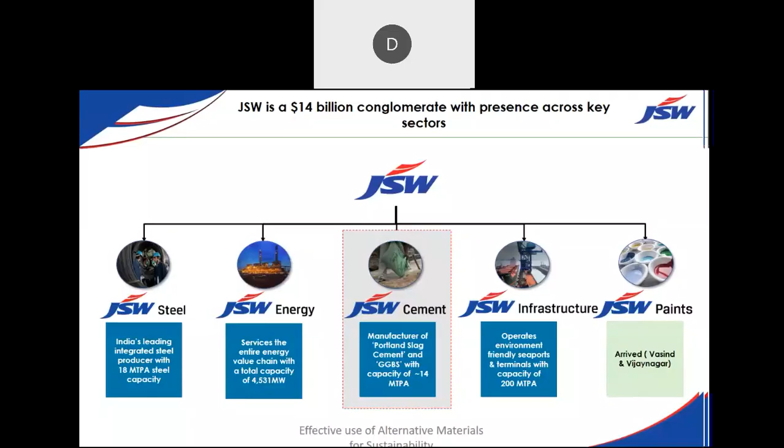I thank Dayananda Sagar Academy of Technology and Management for providing this wonderful opportunity to share my knowledge on effective use of alternative materials for sustainable and durable construction. It's a great event because tomorrow is Engineers Day. Sir M. Visvesvaraya was born on 15th September, and we celebrate Engineers Day across the world. Also, Indian Concrete Institute Bangalore Center is celebrating Engineers Day tomorrow.

Before starting my presentation, I'd like to take you through the journey of my company, JSW Group - our verticals, and how we are present throughout the world in terms of business and building materials. We are an integrated building materials company, a $14 billion conglomerate. We are into steel manufacturing, one of the largest steel producing companies in the world, and also into energy. Recently we ventured into green energy, especially wind and solar, with an installed capacity currently of 4,531 megawatts, going forward to 10,000 megawatts, with a focus mainly on sustainable green energy.

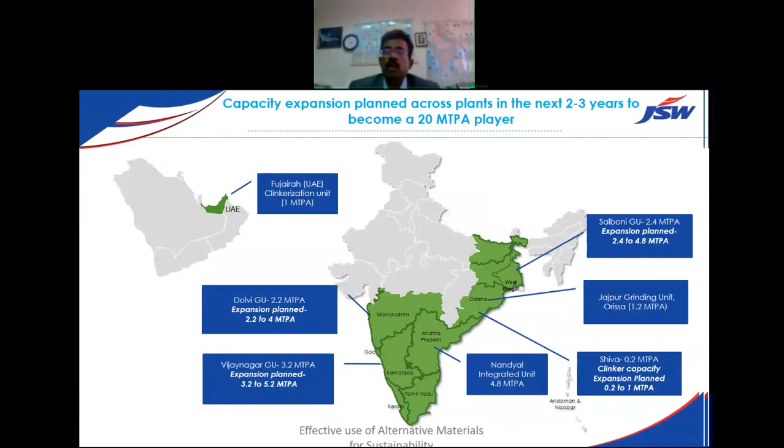As a cement company, we are present in various parts of India - south, west, and eastern parts, and very soon we are going to be in North India too. Many products are there, all eco-friendly - whatever JSW manufactures is very eco-friendly. PSC cement, Concreel HD, and Compocem, a composite cement. JSW GGBS is one product consumed by all RMC plants - 99% of RMC plants use it as a sustainable secondary cementitious material replacing OPC cement. We also make OPC cement to cater to RMC plants where they blend OPC along with GGBS to make blended concrete.

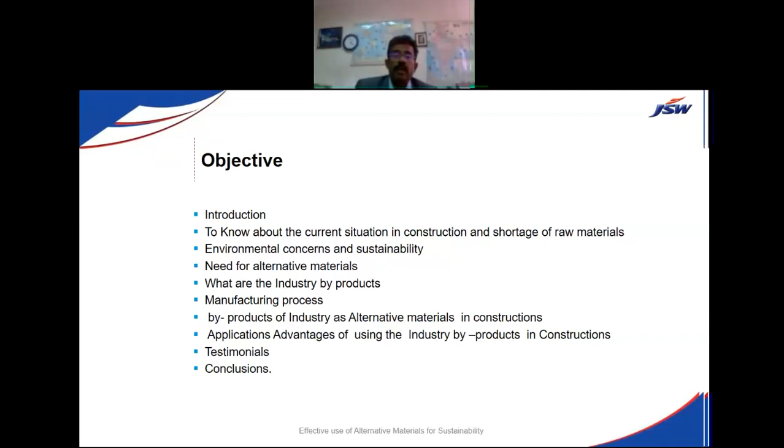So today the main objective is to talk about environmental concerns we are facing globally, and the need for alternative materials - how by using industrial byproducts we can make construction very eco-friendly, whether concrete production or other composite construction. What are the manufacturing processes for these eco-friendly materials, how we can convert byproducts into suitable eco-friendly products for concrete construction, advantages, applications, along with testimonials and conclusion - these are the various things I'm going to talk about today.

Dear friends, this is the big challenge ahead of us: by 2050 the planet is going to have 10 billion population, currently close to about 7 billion. India is having 1.3 billion, China 1.3 billion - these two countries alone contribute almost 40% of the world's population. We have other highly populous countries too, and majority of the population is going to live in urban environments. Urbanization is very fast - probably by 2050, 50% of India's population will be living in urban cities, urban areas. With that, we are going to create concrete jungles.

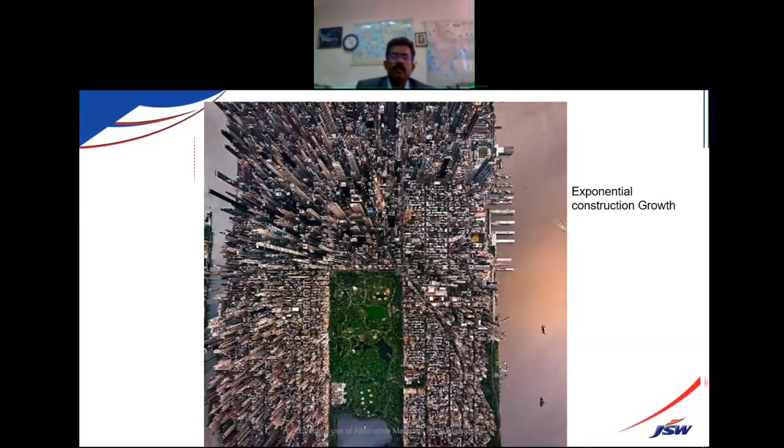So coming to our core topic today, cement production. 1 ton of cement production, we all know it is not an eco-friendly activity. We require about 1.5 ton of limestone, and we use coal to heat the limestone up to 1,500 degrees centigrade. We also consume electricity, and with all that, what's going to happen?

The carbon dioxide emissions for production of 1 ton of cement is close to 0.8 to 1 ton. Latest statistics show an average of about 0.65, 650 kg per ton of cement production. That is the global average now because of various measures we have taken. Whereas at JSW, whatever cement manufacturing we do, we manufacture eco-friendly cements. Our carbon footprint per ton is equal to about 300 kg, below 300 kg. We have already achieved a global benchmark in terms of cement production and sustainability.

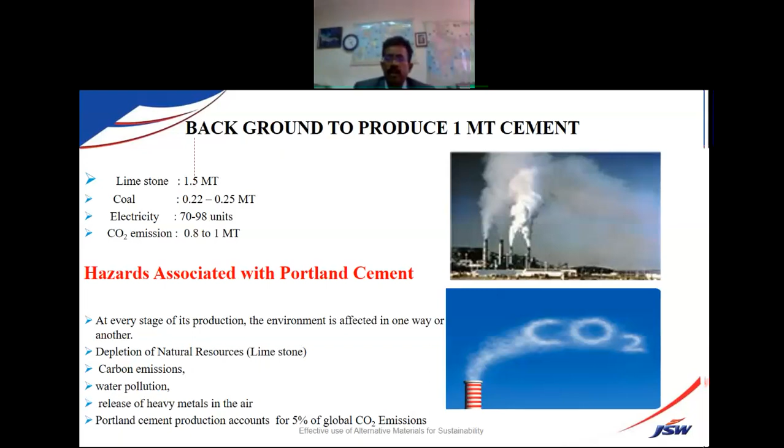So we all know that cement production liberates about 5% of the total carbon dioxide emissions. So we're having this greenhouse gas effect because of these environmental issues.

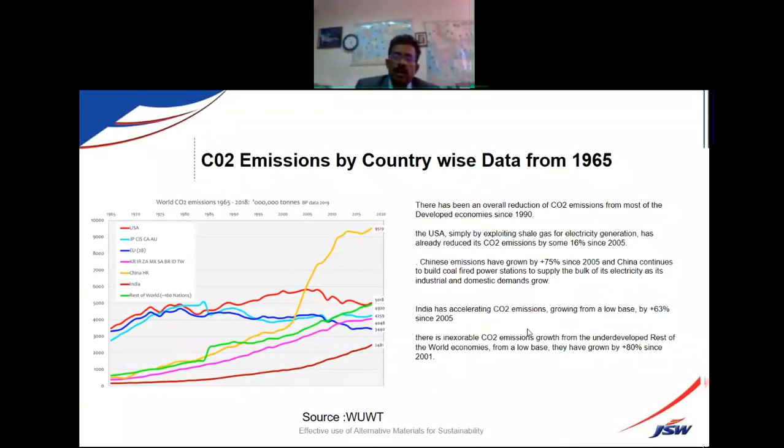As per the data, 1965 CO2 emissions country-wise is given. But as we go towards 2020, we have a very different scenario. China emits 27% of the carbon dioxide emissions, the most of any country. America 11%, it's a vast country, and India is not lagging behind - 6.6% of CO2 emissions are happening because of our various activities.

We also produce the second largest quantity of cement in the world, close to about 400 million tons. The installed capacity is 550 million tons.

So, looking at these figures, we need to really work very hard to bring down the carbon dioxide emissions because our population is going to increase, our cement consumption is going to increase, and we should not overtake America. America's cement production is close to 200 million tons, and they have taken all the precautions to control emissions. Whereas India is a fast-growing country, and continuously we are producing more and more cement, more and more steel to cater to the requirements of infrastructure development.

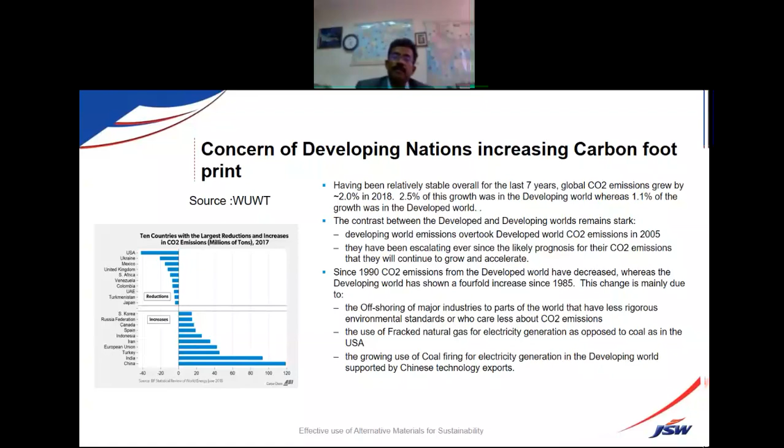So sustainable needs, impact of construction. When we do construction, not only the building construction, we have to maintain the building at various temperature gradients. In cold countries, we have to heat the entire building to keep it warm. In tropical climatic countries, we require complete cooling in the summer time because of the rise in temperatures. We need to keep the temperature at an optimum level.

This is creating a major impact on CO2 emissions. 30% of gas emissions are happening because of construction activity alone, and 10% of the world's finest dust, because construction liberates a lot of dust that we are not able to control. In India, especially, we don't care at all about how to cover it. Now in the urban environment a lot of things are happening, but otherwise we don't care at all.

We also consume a lot of water for making concrete, and a lot of land. So these are all not environmental activities.

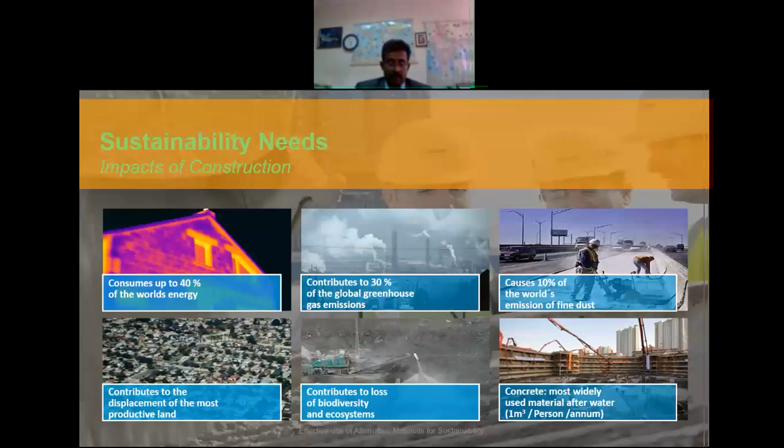By 2050, the cement requirement will be 7 billion metric tons. That means 2 times the requirement of sand - 14 billion metric tons, or 20 billion metric tons of sand is required. These are the two important materials we use for concrete making, and similarly, billions of tons. You multiply 7 by 0.65, and maybe it's about 4 to 5 billion metric tons of CO2 emissions that will happen.

This is creating a lot of problems. Additional cement plants are required, leading to a tremendous increase in landfill because of mining activities, a tremendous increase in CO2, and a tremendous increase in freshwater usage - you require a lot of water to maintain cement plants. So this is not a very eco-friendly activity.

So how do we augment it? We cannot stop construction, but we need to augment the usage of pure OPC cement by replacing OPC cement using various industrial byproducts. Also, the natural river sand used for construction can be minimized by using alternative building materials. I'm going to talk about all these materials one by one.

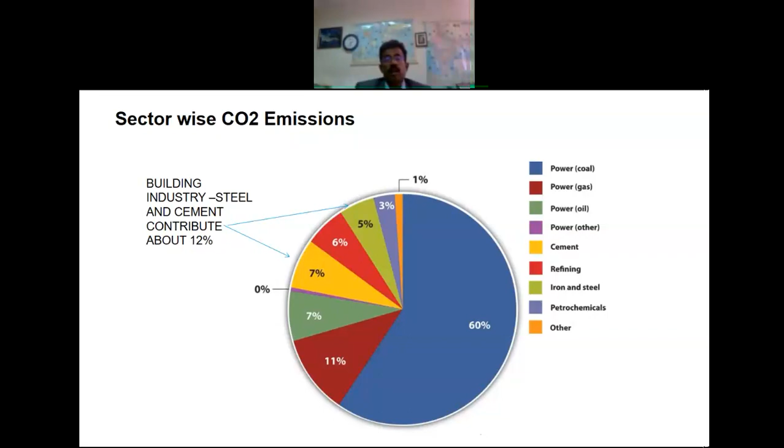So this is what I already showed you. Cement and steel put together create about 5 plus 7, about 12% of CO2 emissions. And industry-wise, if you look at the highest carbon dioxide emitting industries, they are cement and iron.

We have 31.2% of total industrial emissions coming from cement, and another 28%.

Totally put together, almost 60% of the total industrial sector carbon dioxide emissions are coming from these two products, which are the primary materials for construction.

So we've talked about the carbon footprint and how the world is reacting to changes in mitigating CO2 emissions. In construction, we have a major role to play.

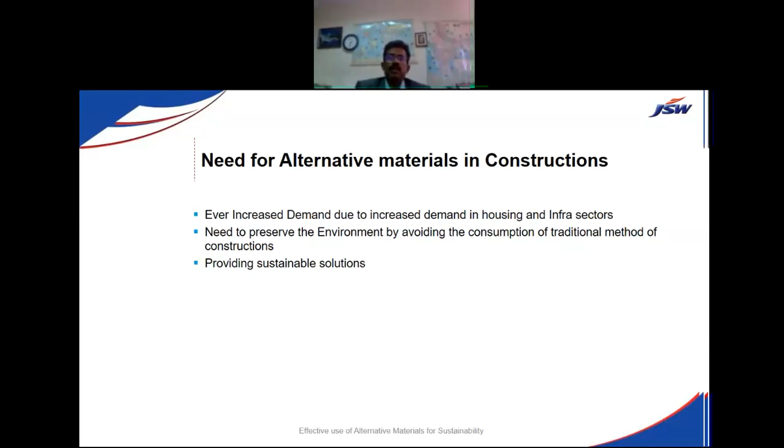Being civil engineers, we have to find solutions. The sustainable solutions should be eco-friendly and also cost effective. They should not be very costly.

In construction, we always look for cost-effective solutions that last longer. So as civil engineers, our role is to make concrete construction sustainable.

So, the principles of a sustainable building. We civil engineers and architects all know that for a building to be sustainable, it should have structural efficiency, to minimize the environmental impact associated with the life cycle cost.

It should be energy efficient. It should utilize natural light and solar energy.

Water efficiency means using grey water and regulating usage to reduce the water quantum needed in maintaining the house, along with material efficiency.

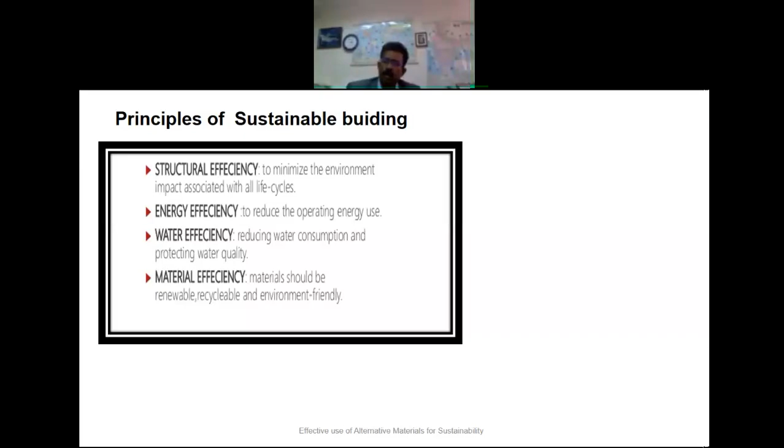Material efficiency comes by using alternative materials which are renewable, recyclable, and environmentally friendly. So when constructing a building, we look at all these factors to make it sustainable, eco-friendly, and a net zero building.

Net zero building is the concept gaining traction globally now. Many countries have adopted it. Europe, by 2050, wants to make the entire construction sector net zero.

That means, in construction activity, which is emitting 40% of CO2 emissions, they want to bring it down to zero. So how do they want to achieve it?

They have various methods and have adopted various technologies now in cement manufacturing and construction, all aimed at making construction net zero by 2050.

So one company has recently launched a new product, Enviro Mix, a totally new approach in concrete making, released by one of the admixture companies, Chryso from France.

So what is sustainability in a common sense? Sustainability doesn't mean just a fundamental rule. We have to consume what is required for today without affecting the consumption pattern of tomorrow's generation, the next generation.

That's called sustainability. If you want to define it formally: sustainability is meeting the needs of the current generation without compromising the ability of future generations to meet their needs. That is sustainability in common sense.

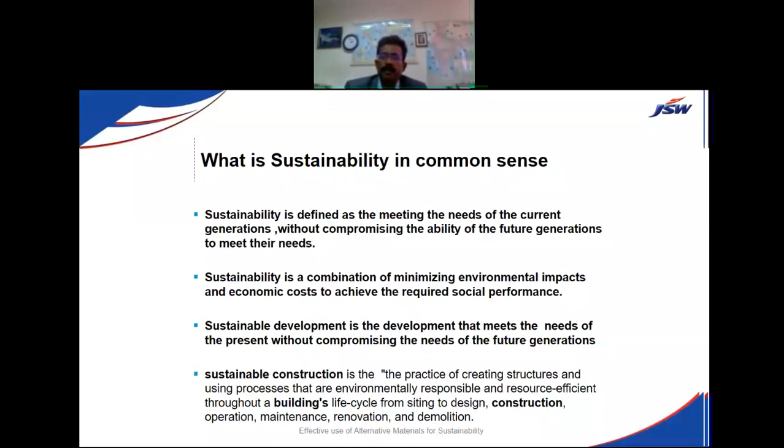Coming to sustainable building materials, as I've already discussed, they should be procured from renewable sources. Renewable sources means byproducts of an industry that are recurring in nature.

If you are using slag from a steel mill, steel production will continuously happen, generating around 30% slag. So it's a recurring product — whatever we keep using keeps on coming as long as we are making steel.

Similarly, fly ash comes from a thermal power plant. As long as we are producing power through thermal sources, we will get fly ash. That way, a sustainable material is a continuously available material.

The cycle for sustainability fits into getting economic profit and giving social benefit to the people. It should be a viable solution, equitable in its costing, and bearable.

That means it should be a product of eco-friendliness, not damaging any environment. That's what the sustainability cycle actually calls for.

So, one step forward: lower the CO2 emissions, lower the energy requirement, prolong the life of the building, and find local solutions to local problems using global technologies.

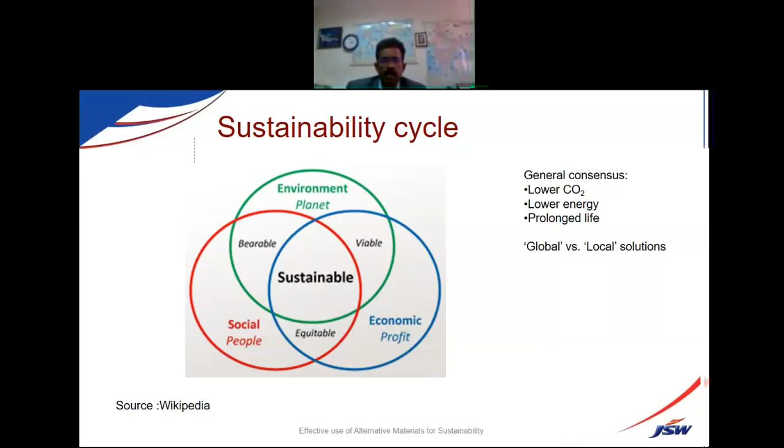So now I'm going to the core topic of concrete. We all know concrete is a man-made material, the second most consumed product on this planet. So when we make concrete, we are using various ingredients.

One of the main ingredients is cement and water. Cement comes from cement manufacturing. The other product will be fine aggregates. Earlier it was natural sand, river sand, but now we have got various types of manufactured products: M sand, slag sand, copper slag sand, fly ash based sand. So many aggregates are now available in the market based on the nearest source available of this material.

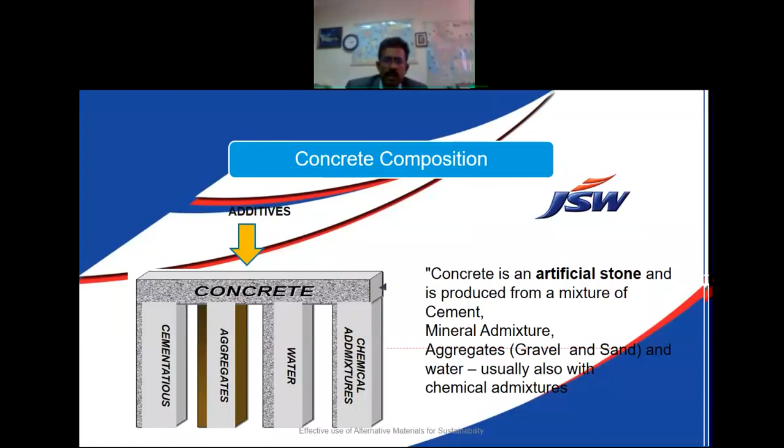Then one more product which is changing how we are making concrete is chemical admixtures. Way back in 1982, Fosroc was the one company which started here in Bangalore. After that, now there are more than 3 to 4,000 chemical manufacturing companies. They manufacture various admixtures: retarding plasticizers, PC-based admixtures, accelerating admixtures based on your requirement, air entraining agents, waterproofing products. There are many admixtures we are using, mixing with concrete. So now concrete has become a mixture of admixtures.

Earlier we were having four products: water, cement, aggregate and sand. But now more than 10 products go into making concrete based on application. We may be wondering what these 10 products are. We don't know all these products.

I'll tell you, people are using slag sand or copper slag sand. Then they're using GGBS or fly ash. They're going for ultrafine material: metakaolin, microsilica, ultrafine fly ash, ultrafine GGBS. So there are four products based on the requirement. Then we are using fibers. In terms of admixtures, we are using waterproofing admixture, PC-based admixture. So already how many products have we put? More than 7 to 8 products, to modify the properties of concrete, to modify the flowability, to improve the strength and durability performance.

Sustainable concretes are concretes which are designed using eco-friendly materials, optimization of material. So in mix design, how much cement are we going to use? Generally maximum is 450 kg OPC cement. We can think of using that for even M100, M200 grades of concrete. But 450 kg will not suffice. We are going up to a powder content of 700 to 750 kg when designing M200, 250 MPa concrete. We are using up to 750 kg, but not pure cement.

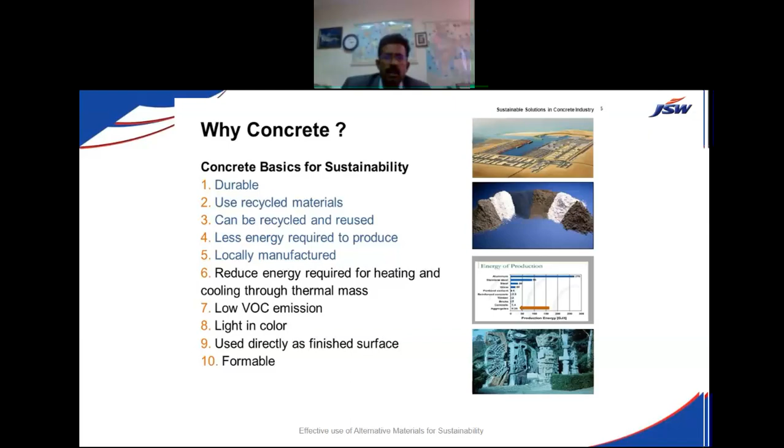So I've already discussed these points on cement. The replacements for OPC cement, in reducing the carbon footprint, are slag and fly ash - these are the main replacements. But of late, they are also using calcined clay to make cement. And at the higher end for high performance concretes, we are using ultrafine materials.

For aggregates, we are using demolished waste as a substitute. Up to 25% is allowed as per IS codes. There are certain countries which are using up to 50% replacement of virgin aggregates with recycled aggregates.

For fine aggregates, we have got many alternatives to river sand - slag sand, crushed stone, crushed fines. For water, we have to reduce the water requirement. Earlier we were talking about a 0.5 water cement ratio, but now we can make a flowable concrete at a water cement ratio of 0.3, even up to 0.26 we have achieved, using various chemical admixtures.

At the end of the day, we are looking for high durable performance of the concrete overall.

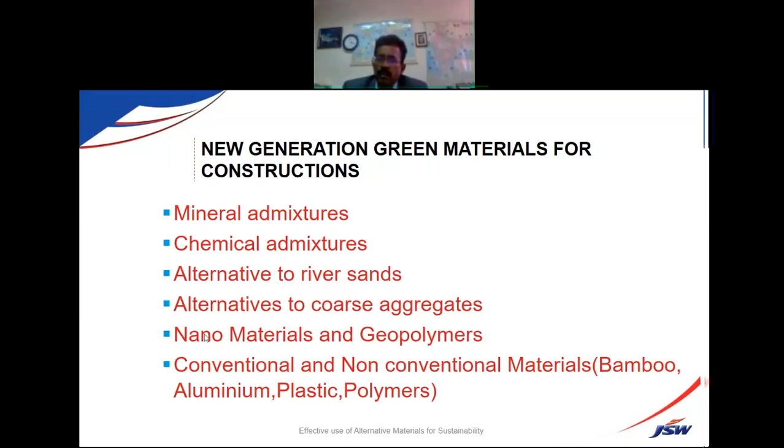Coming to the new generation green materials, we have to use and depend on these alternative materials to make concrete and construction sustainable. I've already told you about mineral admixtures, chemical admixtures, alternatives to river sand, and alternatives to coarse aggregates. Steel slag aggregates are also available now. Nanomaterials and geopolymers, ultrafine nanomaterials, have come to the market, which modify the properties of concrete based on requirement. Other non-conventional materials like bamboo, aluminum, plastic, and polymers are also gaining acceptance in the current scenario.

So when we look at concrete, you can always question me: sir, you are talking about so much alternative materials, but are they able to give the required workability and required performance of the concrete when we use them?

Definitely. When we design concrete, we look for properties like workability, pumpability, and transportation, pumping up to 1 kilometer. Nowadays a lot of high-rise buildings are coming up in urban environments, talking about 500 meters. In India itself, 350 to 400 meters. In certain cities, recently, the Kingdom Towers being built in Saudi Arabia go up to 1 kilometer. So the concrete has to be pumped up to 1 kilometer. Friends, imagine pumping water itself may be difficult to 1 kilometer.

When you want to pump a very sticky concrete of M80, M100 to cast the columns and slabs, how does the concrete have to go? How much pressure will be there? Imagine that. So we are able to achieve that kind of concrete mainly using technology, without affecting the quality and performance of the concrete.

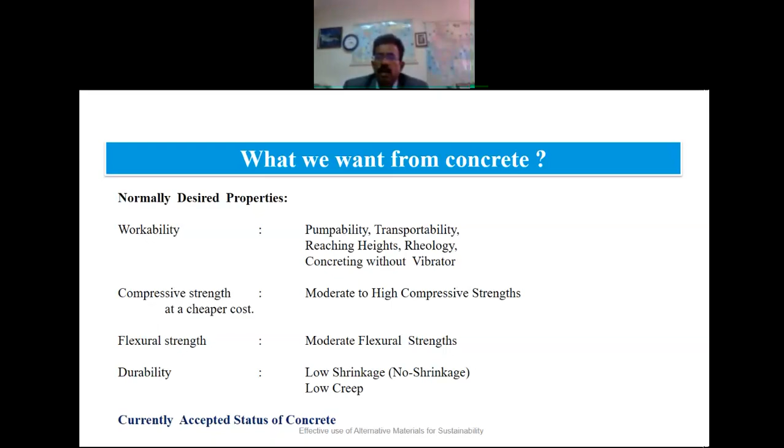So you may ask me, sir, is it permitted as per the Indian standard codes? Because we, being civil engineers, follow all the standard codes for steel, cement, and other materials. Definitely, dear friends, the usage of mineral additives is permitted as per IS 456. You can see in Table 5, it clearly says that you can use additions of fly ash or GGBS to make the concrete, as per the limitations.

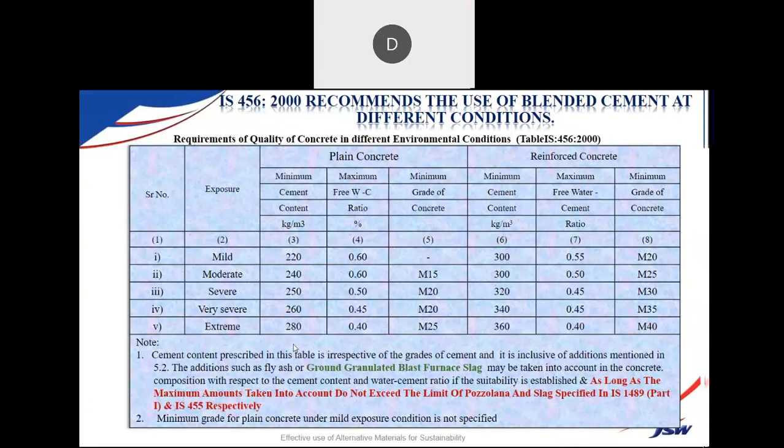So they mentioned that the limitation for fly ash, as per IS 1489, is up to 35%. Whereas for slag, using IS 455, which is the code for making slag cement, up to 70% we can replace the clinker content with slag. How can we replace so much slag? That's also a question mark. Fly ash itself is limited up to 35%. So talking about slag, why do we have to use so much of it, and how can we replace it without affecting performance?

I'm going to talk about how slag is different from fly ash. These are the various mineral admixtures we have. We have fly ash, which is almost grayish in nature. GGBS is white, just like white cement. Metakaolin is also white.

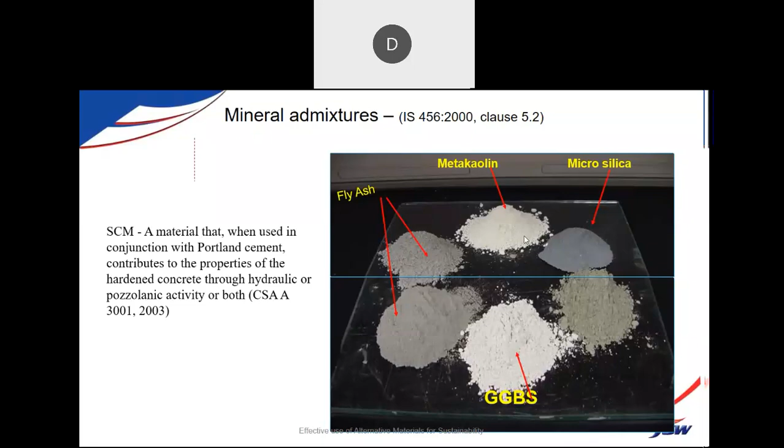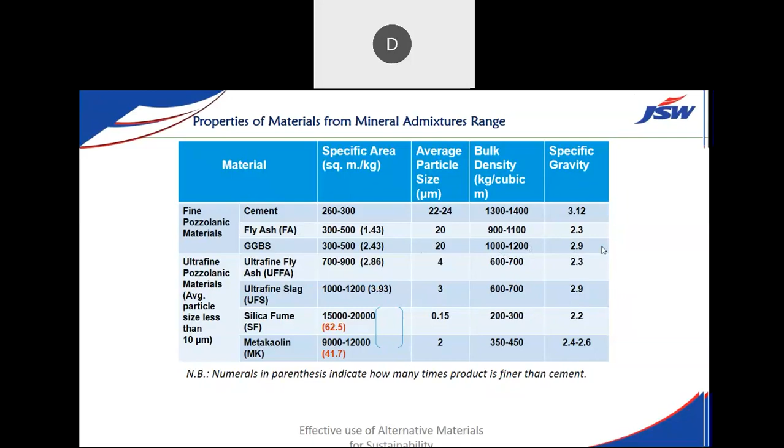So here is a table of the specific area, particle size, bulk density, and specific gravity of these materials. The fly ash and GGBS are almost similar in nature in terms of fineness and specific gravity. We are comparing them with cement only. The fineness and average particle size are also similar. The fly ash specific gravity is 2.3, whereas GGBS is 2.9, which is similar to cement, pure OPC cement, at 3.12 or 3.15. So between GGBS and fly ash, not much difference is there. Both are similar products. That's the reason we are able to replace a higher percentage of GGBS in the concrete matrix.

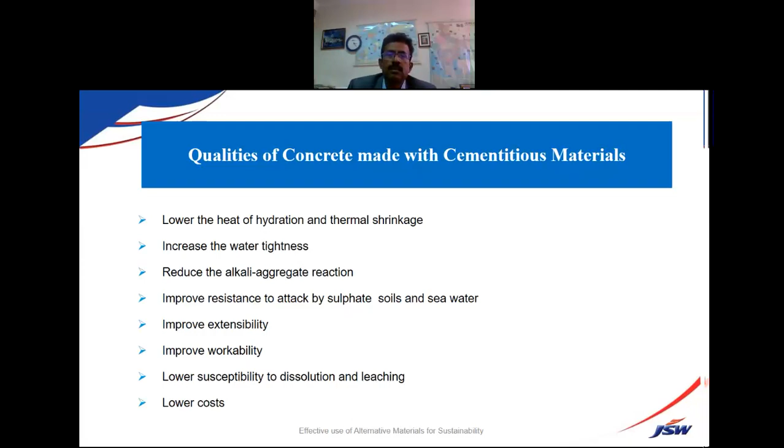So concrete made with cementitious materials has very good advantages. Look at the properties: heat of hydration is lowered completely by using GGBS, and water tightness is increased. I recently published a paper that came out today, and I'll share it with all of you. We have done high volume GGBS concrete for marine structures, where we studied parameters like water tightness, sulfate resistance, and chloride resistance. I'm going to share that article with all of you after the presentation is over.

So overall, the cementitious materials improve the performance of the concrete and the workability, and at the same time come at a lower cost. Because since it's an industrial byproduct, you have to process them, and they are always relatively cheaper compared to clinker or pure OPC cement.

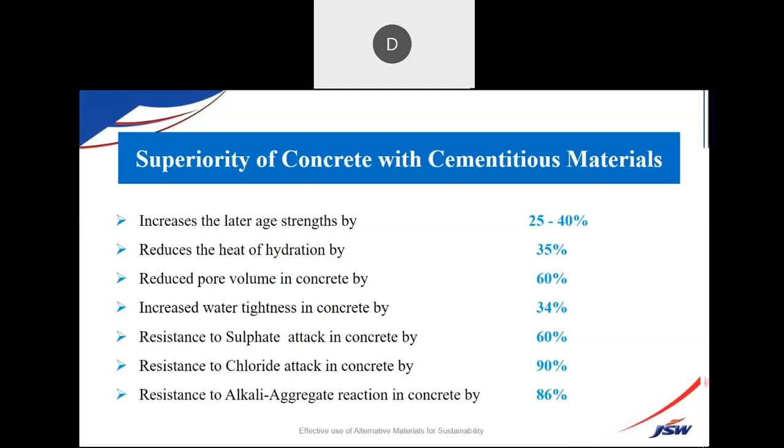Looking at the overall performance, through various research articles, I've compiled these parameters showing how mineral additives like GGBS improve the performance of concrete. Later age strength, at 56 days and 90 days, shows 40% improvement. I've seen this through my own eyes, implementing it in my own buildings, casting cubes for 56 and 90 days when I constructed my house. I could see a substantial gain: M25 grade concrete had become M50 grade concrete, which I tested for almost 90 days. That was the advantage of using mineral additives.

Reduction in heat of hydration avoids thermal cracks, and there's reduced pore volume by 60%, increased water tightness by 34%, and improvements against sulfate attack, chloride attack, and alkali silica reaction. You can see substantial reduction compared to the control mix when using the alternative materials, called mineral additives.

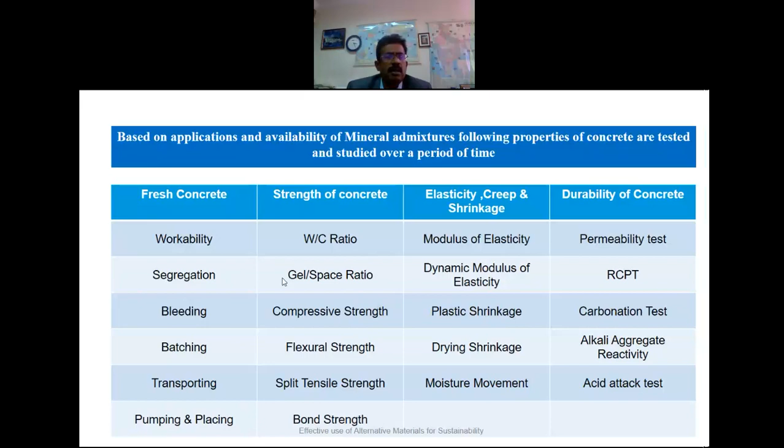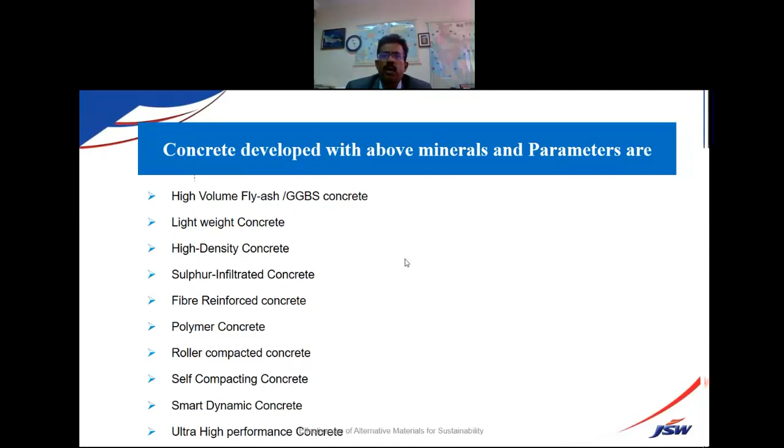There's no limitation when we talk about alternative mineral additives. You can make various types of cement and concrete. For cement, we can make composite cement, slag cement, PPC cement, high volume fly ash cement, high volume GGBS cement - these are all quite possible. Similarly we can make various types of concrete: colored concrete, self-compacting concrete, smart dynamic concrete, ultra high performance concrete, reactive powder concrete, and even light emitting concrete. All of these can be done using mineral additives.

One by one, I'm going to talk about the sustainable products. I want to give a brief overview of how they are sustainable and how they are going to help us.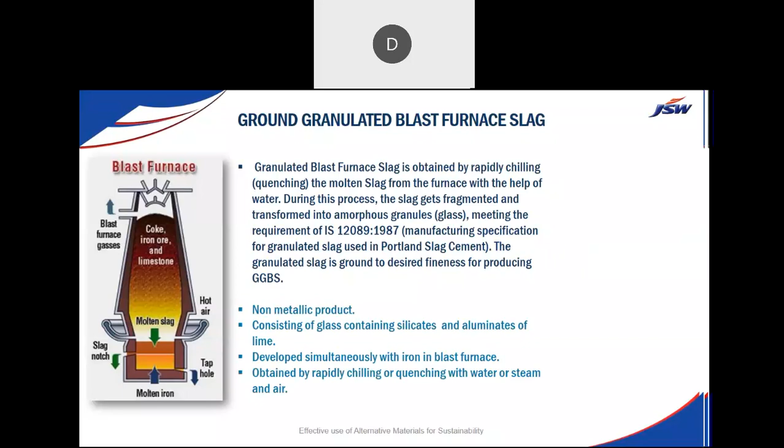Recently I visited the Bellary steel plant. We get a molten slag, which is about 35% floating above the steel. The steel is taken out to make various steel products - steel, TMT bars, coils, automobile steel. Many grades of steel are manufactured at an integrated steel mill. Then we get the molten slag, about 30-35%, and we take it and quench it into granules. It's a non-metallic product.

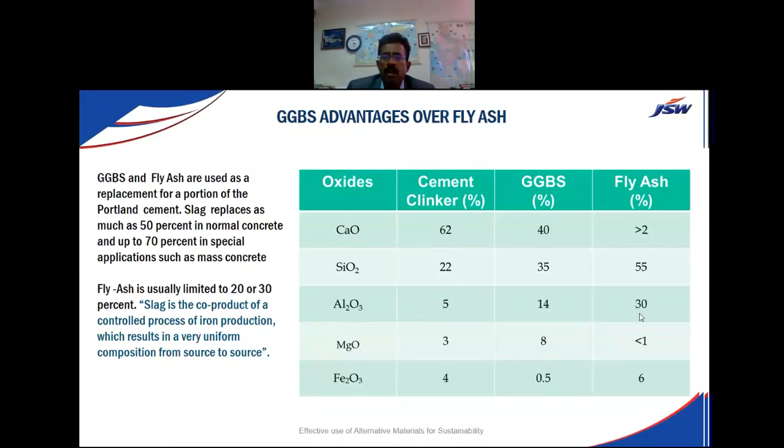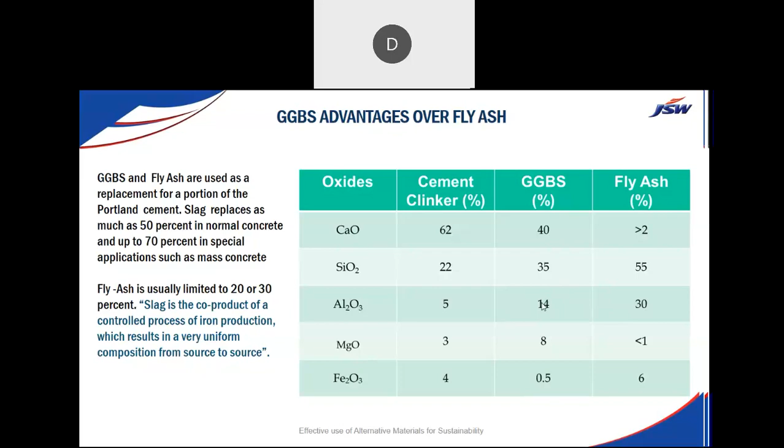Now I'm going to talk about how GGBS is better than fly ash. You can see the table here showing the calcium oxide content. If you take pure clinker, it's 62%. GGBS has 40% calcium oxide, whereas fly ash has more than 2%. For silicon dioxide: clinker 22%, GGBS 35%, fly ash 55% - this is what makes fly ash more reactive. Al2O3 is up to 14% and should be controlled to 5% in cement, but in fly ash it's 30%. So calcium oxide is the main product that really helps GGBS perform, because GGBS has 40% calcium oxide.

Apart from the chemical composition, we have various parameters. The earlier code, IS 12089, talks about raw slag, blast furnace slag. We tested the JSW slag along with the standard specification given as per IS 12089, and in all parameters, the JSW slag being manufactured surpassed the results. Even the glass content is 90 to 95%, whereas the requirement is 85%.

Regarding replacement levels, we can replace various percentages of cement. We can replace 25 to 35% when doing precast construction, where you require early strength - maybe 14 to 15 MPa, or 22 MPa in 24 hours. Sometimes they ask for 20 MPa in 12 hours.

Many specifications are there. Similarly, when doing underground construction, GGBS can go up to 50%, with a minimum level of 35%. For mass concreting applications, it can go up to 65% - I've seen many marine structures and mass concreting applications going up to 65%. Recently, we are doing concreting for the L&T Seabird project, Karwar Seabird project, where the GGBS replacement for M45 grade concrete, in a marine environment, has gone up to 70%.

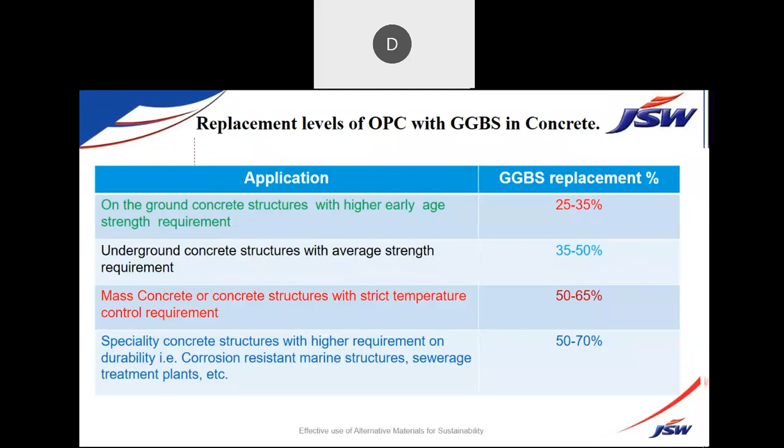So you can always question me, sir, all is okay, but you are talking about higher improvement in compressive strength and long-term durability. How is it going to be achieved? We just replaced cement with GGBS. Cement is a fast-setting product, and we have seen its performance. Dear friends, GGBS also works like cement when mixed.

In the concrete matrix, water is added to the cement and the hydration process starts. We get calcium silicate hydrate gel and calcium hydroxide. This is about 70%, and calcium hydroxide is about 30%. The combination changes here and there. This calcium hydroxide is like cholesterol in the concrete body. It keeps absorbing moisture, carbon dioxide, and other harmful chemicals like sulphates and chlorides, and damages the concrete and the reinforcement. So this has a lot of small voids and pores.

So what will GGBS do? The moment you get these two products, the GGBS will immediately attack the calcium hydroxide and convert this into calcium silicate hydrate gel. This pictorial diagram shows that by using GGBS, you definitely get a double reaction. And double reaction means double strength.

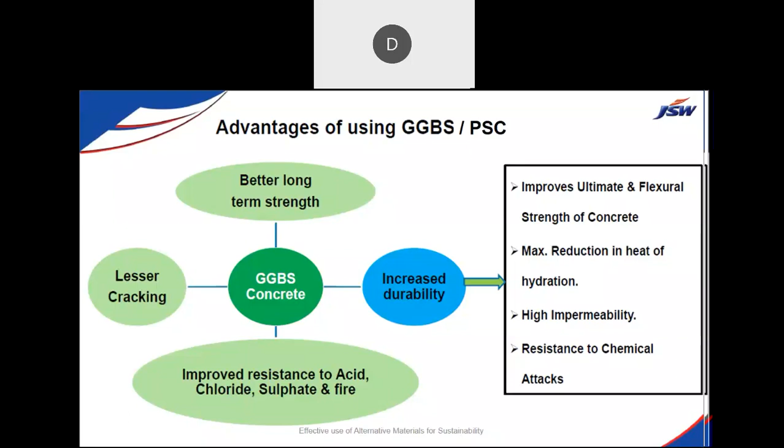We already discussed these parameters. This is a pictorial representation. GGBS gives long-term benefits to the concrete: long-term strength, lesser cracking, high impermeability, and resistance to chemical attacks.

I was discussing earlier how in the last 5 years you have saved so much. 62.85 million cubic meters of concrete we have produced using GGBS in the last 5 years, and the cement replacement is close to 6 million tons. Carbon dioxide emissions reduced by close to 5.24 million metric tons. Limestone, 8.36 million tons we have conserved. Imagine, it's all in millions of tons. We saved 10.37 million tons of mass from landfill.

So we don't have to fill it again, because if you keep excavating the limestone, later on once the mine becomes empty, we have to fill it, no? That's the reason.

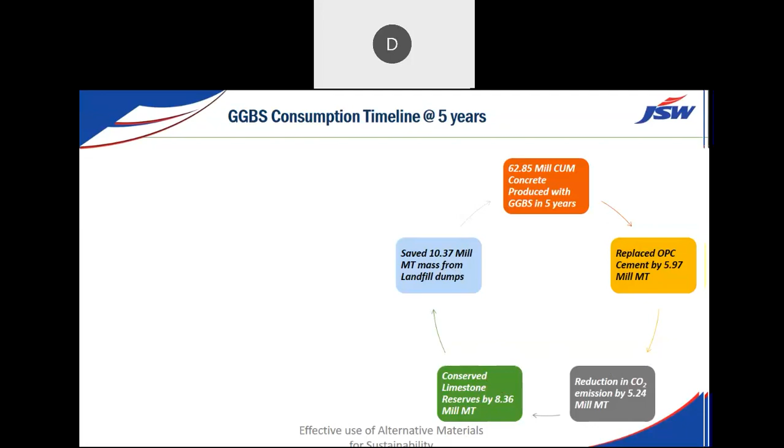So in calculating, let's say you are building a small house, you can ask me, okay, how can I calculate the reduction in CO2 emissions if I'm doing M20 grade concrete, only 50 cubic meters, 30 cubic meters, 20 cubic meters. You can definitely calculate. For 1 cubic meter, we know one tree can absorb 22 kgs of carbon dioxide per year. This is the statistics available. So over the entire life of a plant, maximum it can absorb 1 ton of carbon dioxide.

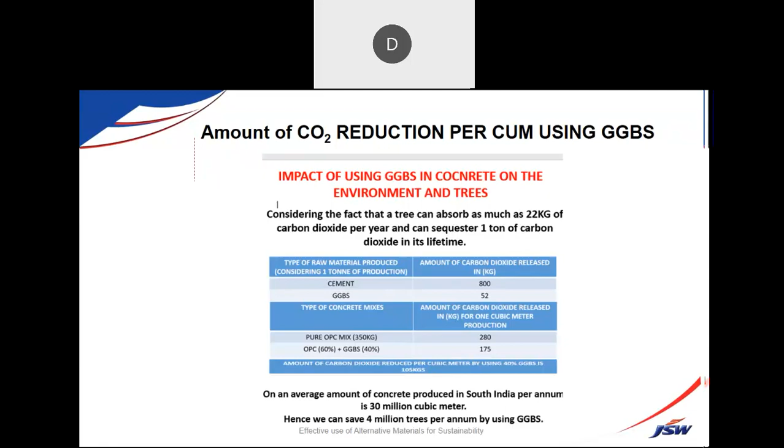A plant, okay. When you are making concrete using GGBS, replacing about 40% of the cement content, I'm talking about close to 104-105 kg CO2 reduction happening per cubic meter. So if I'm using 20 cubic meters, then we save 2 trees. If you're using 10 cubic meters, it's equivalent to 1 tree.

That's how, for smaller projects, I've given the statistics: 10,000, 25,000, 50,000, 1 lakh, 1.5 lakh, 2 lakh cubic meters. So approximately it's 1/10. Let's say you are making 10 cubic meters, then one tree. Straight away you can have a thumb rule, you don't have to worry so much about calculations. So 100 cubic meters equals 10 trees. Like that, we can calculate.

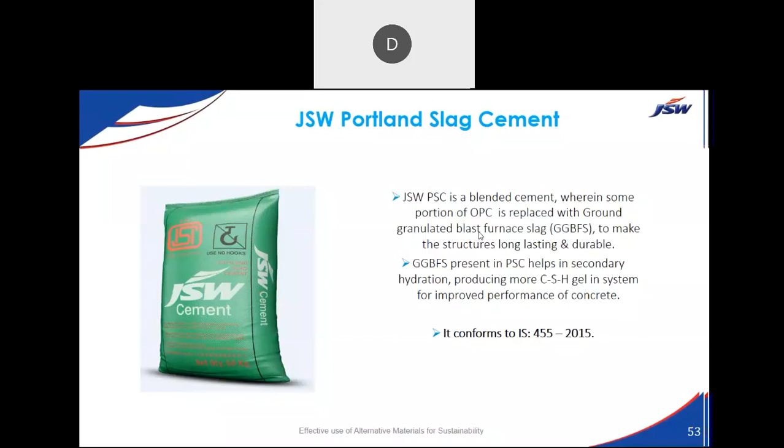Coming to the various alternative cements, JSW Portland Slag Cement has more than 50-55% slag in it along with the clinker. A very eco-friendly cement. One more eco-friendly cement is Concreel HD, a blend of OPC with a lesser percentage of slag, having all the improved performance like OPC cement, where you use 45% slag. The product is manufactured to give quicker early strength like OPC cement. Don't miss this point - people say OPC is quick setting, I want to use OPC cement, but using slag cement also you can make the concrete quick setting.

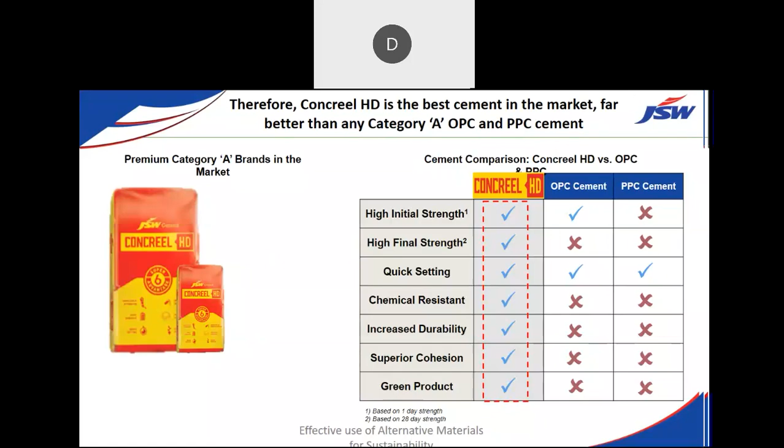There's one more cement called ComCem, a composite cement using both fly ash and GGBS in the concrete matrix. We have cross-checked all the parameters in terms of high early strength, final strength, quick setting time, chemical resistance, increased durability, superior cohesion, and being a green product. Also lesser cracks and reduced bleeding. It's a wonderful cement which is now being marketed in Karnataka.

The composite cement is very good, people are adopting it. It is much superior compared to OPC cement and PPC cement. You can see all the marks here with a tick, while others are like a cross. In all the performance parameters, this is behaving properly.

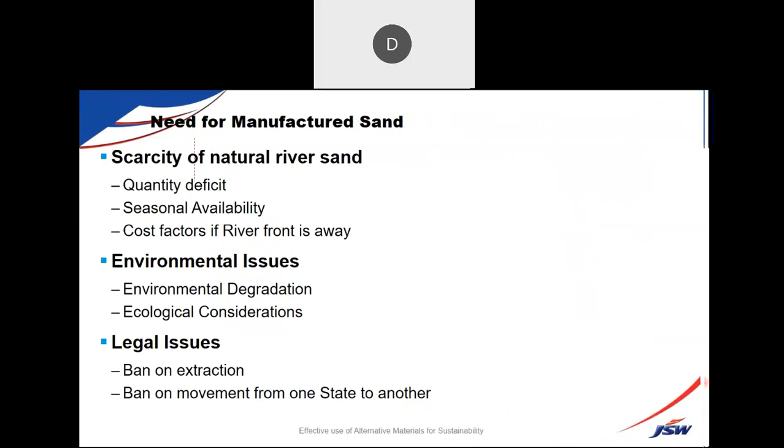So I've covered cement and the main cementitious materials. Now coming to the second part of the presentation, called replacement of river sand. We all know river sand is not available, it's completely banned everywhere. So we looked for alternative materials to river sand, having similar properties. Considering this requirement, JSW installed the first of its kind slag sand plant at Bellary.

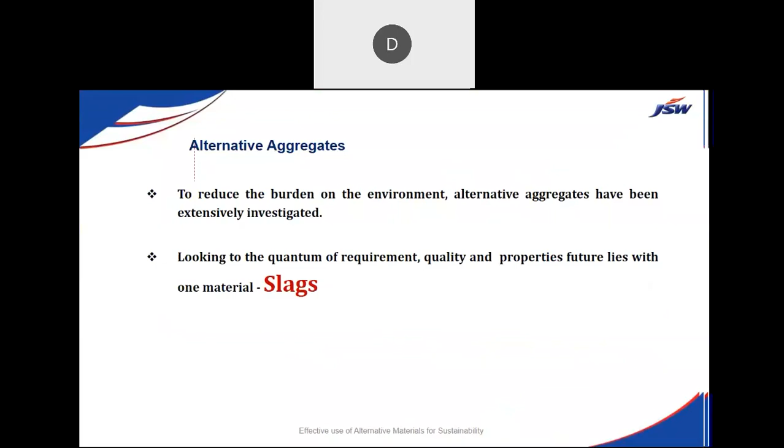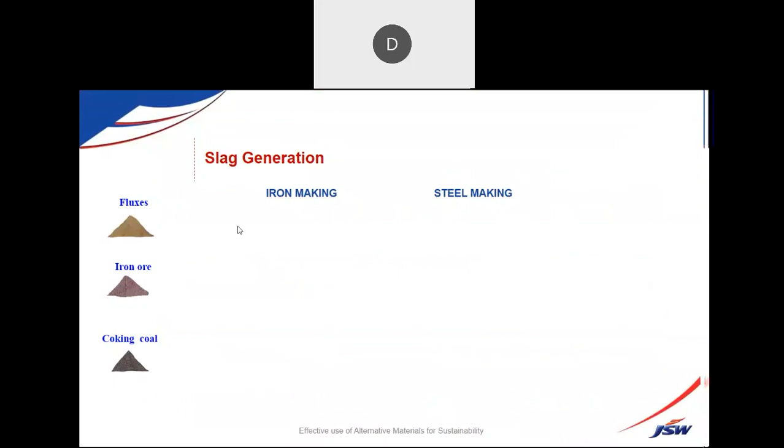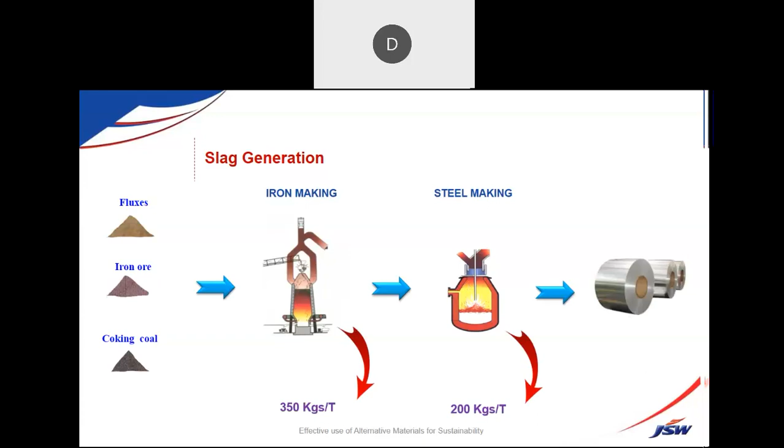In steel manufacturing, we get two technologies: one is iron making, and steel making, where we use a blast furnace. In steel making we get steel slag. So in steel making we get only 200 kgs, whereas in iron making we get 350 kg. This is the difference.

And the moment slag comes out of the blast furnace, we use a good cooling technology, chilling technology, to get granules. The granules are very glassy in nature. They can be crushed into fine powder to make GGBS, which can be used for cement making also. And if you don't convert it into a finer material, you can make slag sand out of it. Using air-cooled LD slag, we can make coarse aggregates.

So the steel industry is like a Kalpataru or Kamadhenu, as we call it. No product of steel making gets underutilized or unused - everything can be converted into valuable products. Even LD slag we are currently working on - you can convert LD slag into fine aggregate called sand.

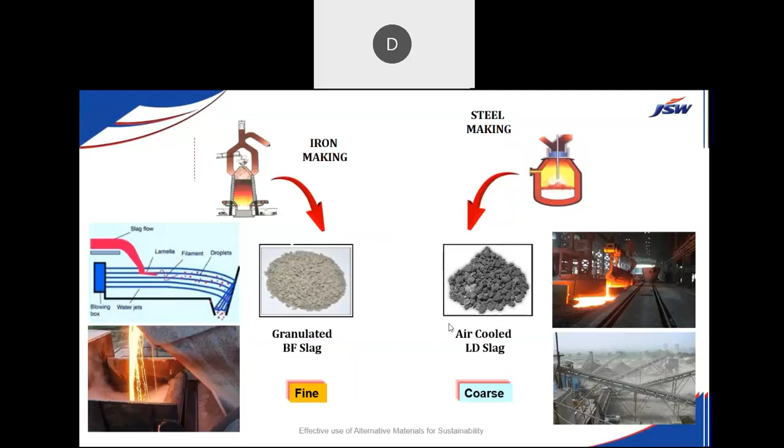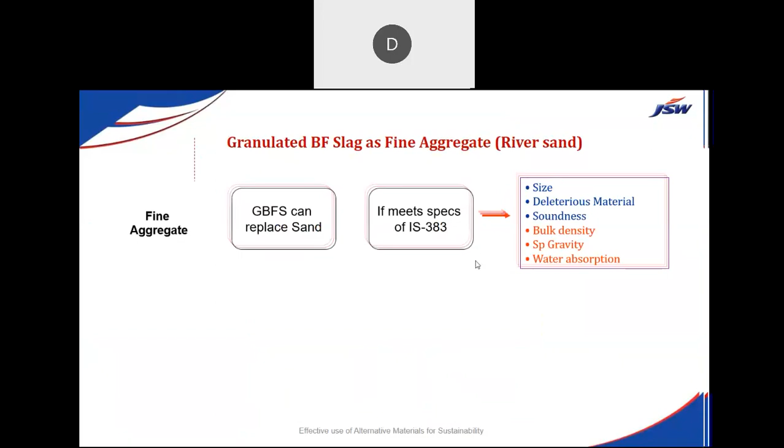So how can we satisfy the codal requirement? What we have done is the processing for the blast furnace slag, converting it into equivalent to river sand to meet the requirement of IS 383 code. So this was the raw material, raw GBFS, and this is processed to get similar density, similar specific gravity, and reduced water absorption like river sand. This is the conversion we have done using these machines.

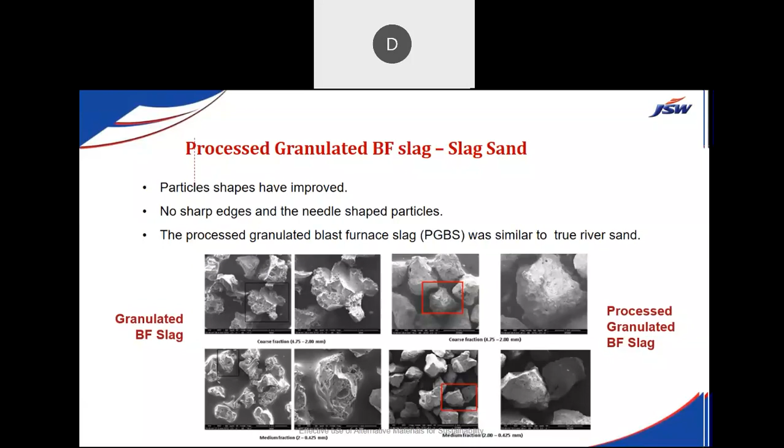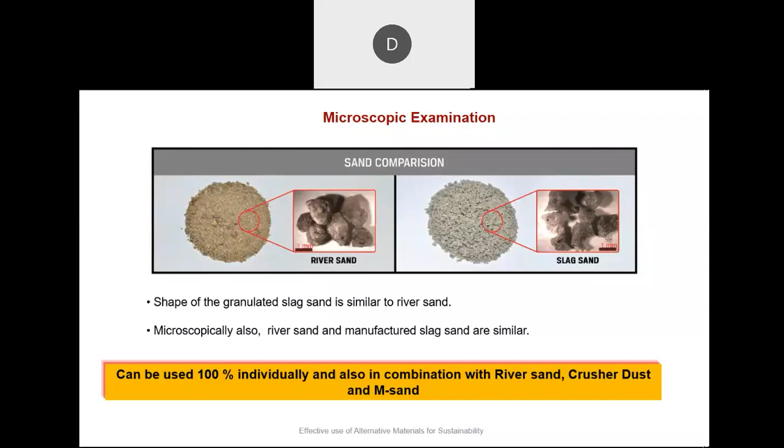So you can ask what percentage we can use. Although the IS code says up to 25% for reinforced concrete and 50% for plain concrete, we have done our own study and testing. We have already been utilizing up to 100%. We can use this slag sand by closing your eyes, just like your river sand or M sand - 100% we can use.

We've also checked for durability and flowability. This is what we have established at the plant at Bellary - close to 50 to 60,000 tons per month is going out. Per day, we are doing about 1,500 tons of sand manufacturing.

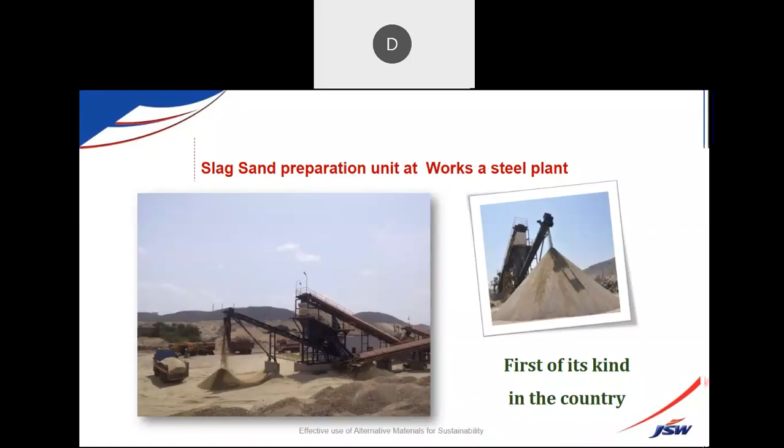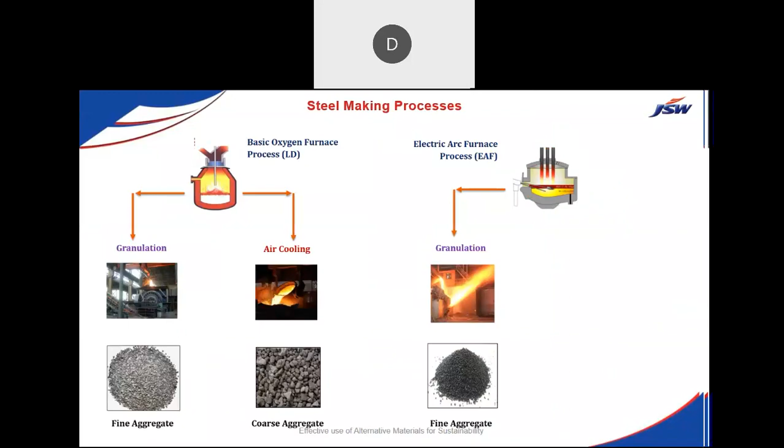In a similar way, we can make air-cooled LD slag aggregates, coarse aggregates. It's a granulation process we have, so we can convert into various aggregates. For any product, before coming to the field, we test it for various applications in our own factory - it's one of the largest campuses for various applications like pavement, concrete, building, and so on. It's tested there, and then at various laboratories we get it tested further. It goes through rigorous testing, and only then is the product released into the market.

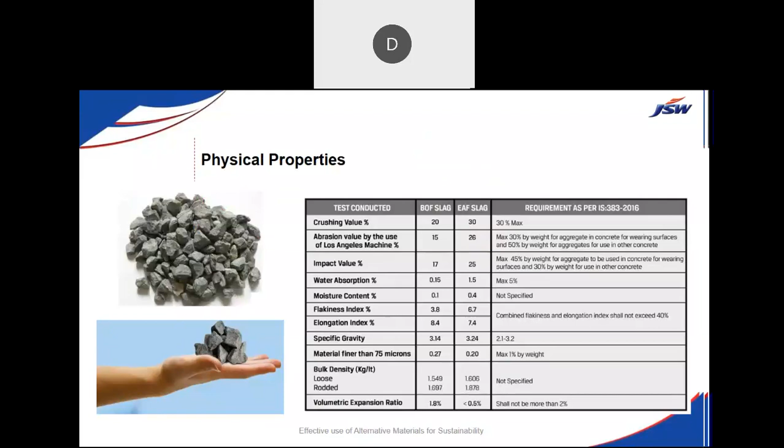Physical properties - so these materials are used for airport runways, highways, flyovers, buildings, seashore protection, paver blocks. These have been tested at various construction sites.

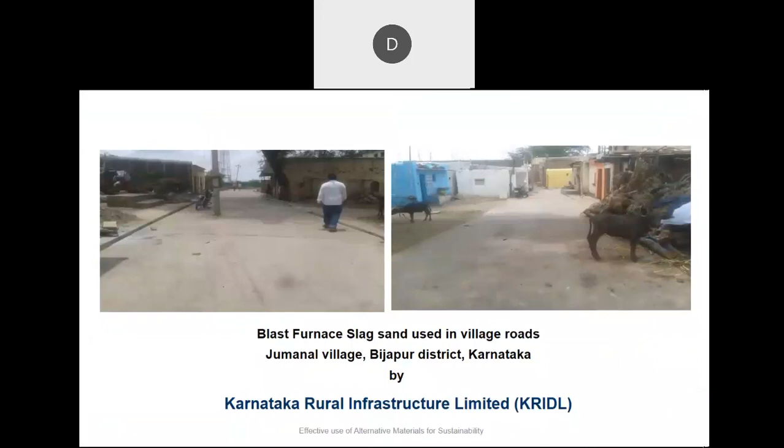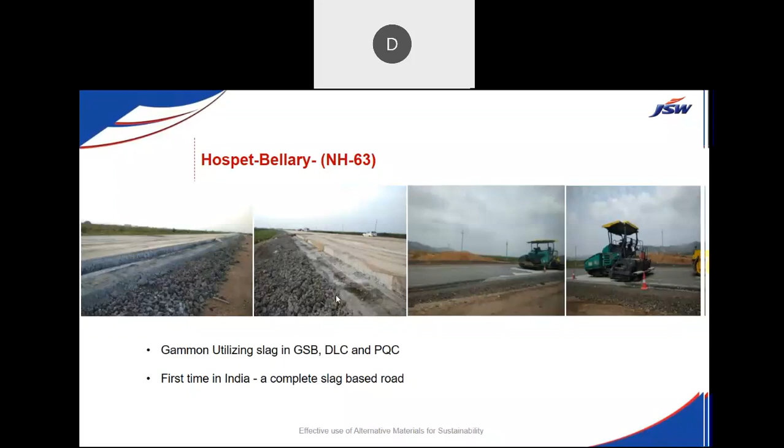Karnataka Rural Infrastructure Limited, we have tested this. The Hospete Bellary National Highway - Gammon India is the company constructing this road, more than 40 to 50 kilometers. This has been done with pure materials from the steel mill, not using any natural materials - these are all processed industry products. This is called one of the greenest highways in India, where they're using GGBS for the PQC and making concrete. The sub-base, everything - GSB, DLC, PQC - everything is done using steel industry byproducts.

And also, the code now says you can use manufactured products. Earlier, IS 383 from 1970 was talking about only natural sources. At that time, the technologies were not evolved, so they were only using natural river sand, which was abundantly available then, and construction was not as high as today's scenario. Now, continuous extraction from the riverbed for natural sand has really affected the ecosystem, so now it is completely banned by the government. They have now approved manufactured aggregates instead.

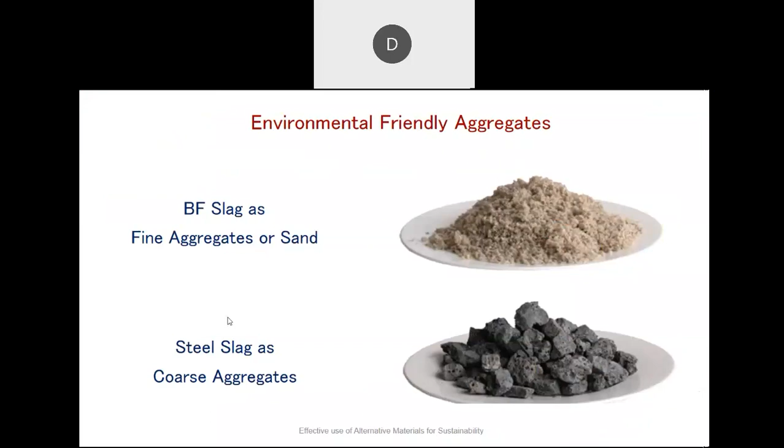Many codes have approved the product specifications. So I would like to say using alternative materials, we can do durable construction which is sustainable and eco-friendly. Future applications, we have done various studies on various applications. By using these technologies, we can use these products for road construction, artificial rock making, railway, and glass.

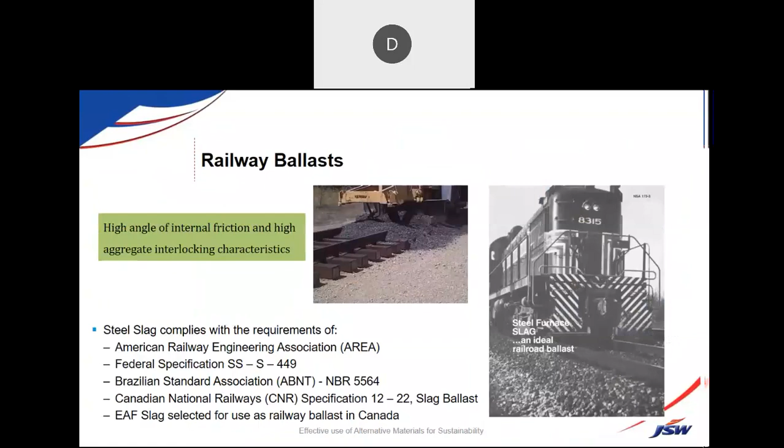So finally, the alternative materials are very eco-friendly. They are sustainable products, and they help reduce the carbon footprint.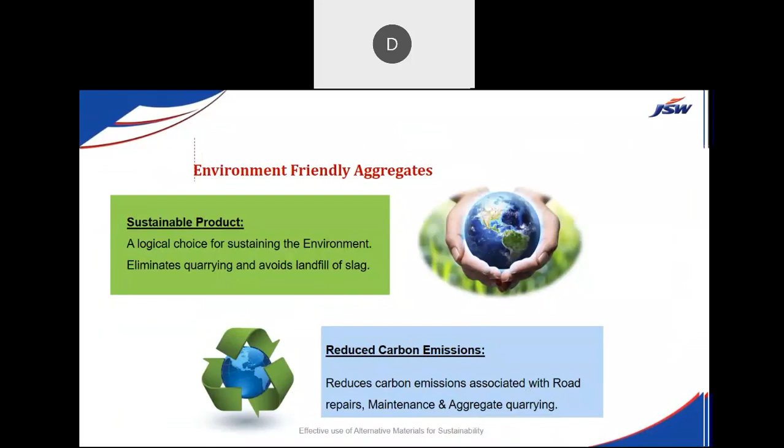Many applications of another material called GGBS, you know very well, can be used for RMC, AAC block manufacturing, asbestos sheets, and also ultrafine materials. For export purposes, we can send it through jumbo bags and other such things.

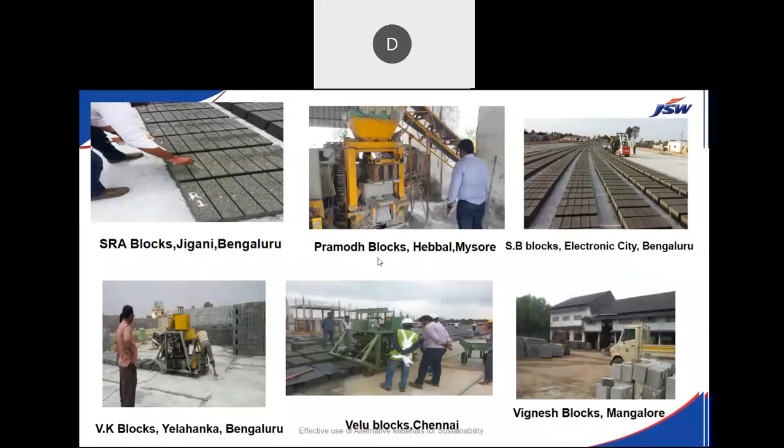Field applications of GGBS in various products - in concrete, we have done from 50 to 70%. The concrete block industry - this product has been successfully tested at various places and they are consuming it. In plastering applications also, the product has been used.

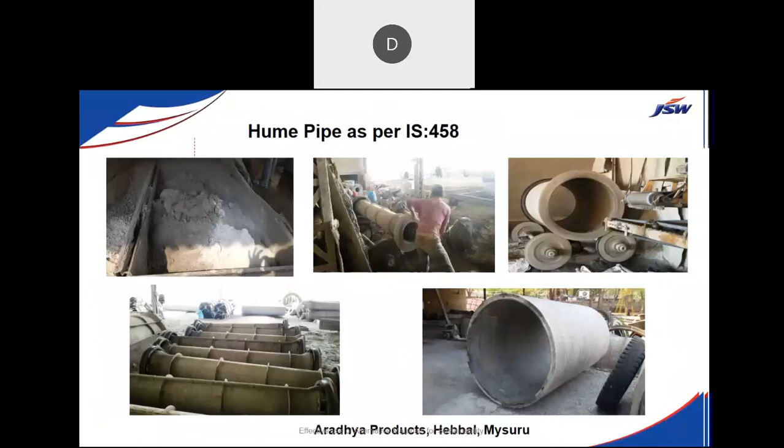Then the blocks, the pavers, the tiles, even including the garden paver blocks, pipes, and other superior concretes like stamped concrete, self-compacting concrete, and pervious concrete, which allows the water to percolate. This is mainly used for the pavement area to drain out the water.

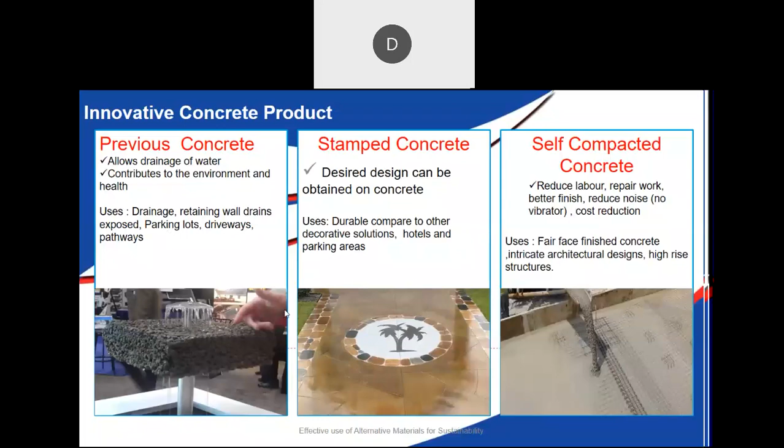Fiber reinforced concrete, then white topping - you may be seeing in Bangalore, a lot of white topping is happening, and there also they use this eco-friendly GGBS. High early strength concrete, good for runways, filling potholes, marine structures, and color concrete.

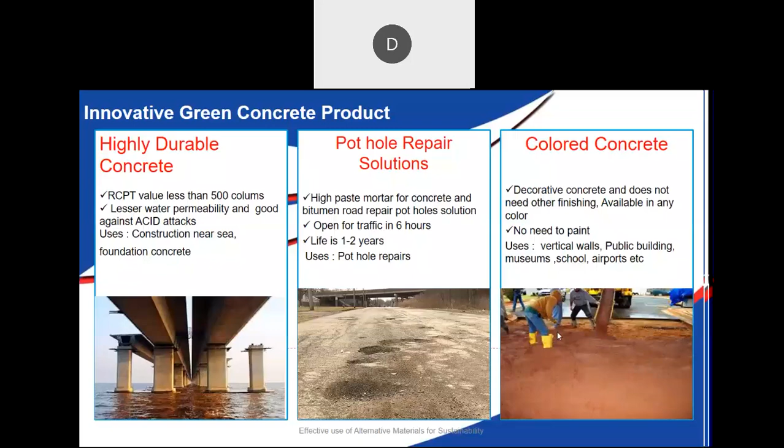Even including soil stabilized roads, we were using 5% cement. Here also, the GGBS has been utilized, replacing 5% or 30% of the cement - we have tried this. AAC blocks also, the GGBS has been used.

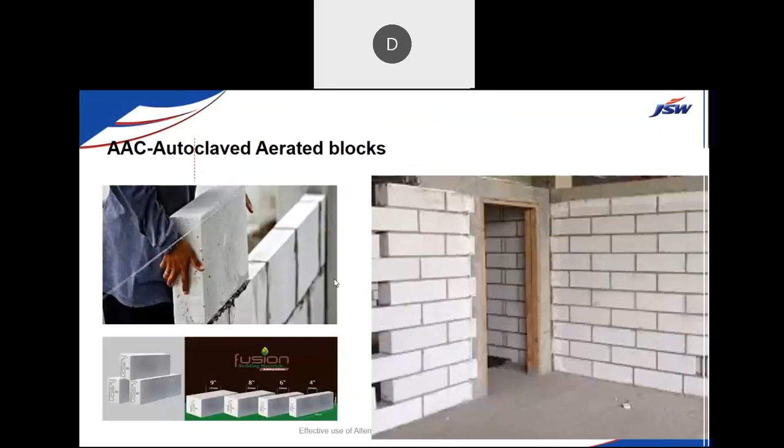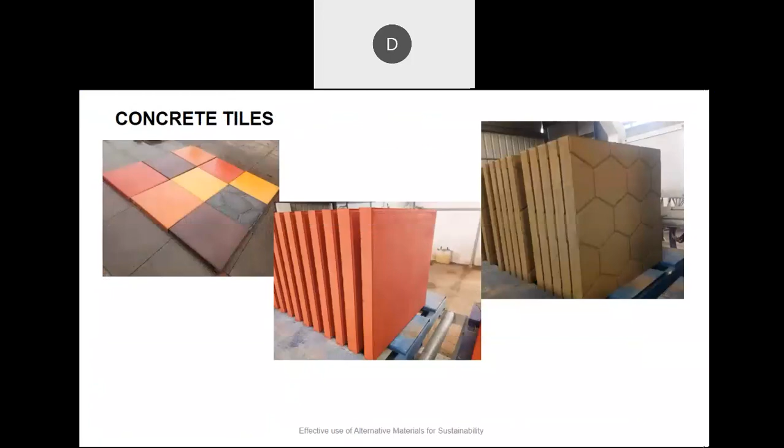These are the decorative tiles and all, very popular nowadays. In smart city projects, we must be seeing a lot of these kinds of items being utilized, smart tiles. And coming to drywall technology also, to be lighter in nature, these alternative materials play a very important role.

So, bio-based products. With all that, I would like to say - environmental impact from the manufacture of 1 ton of products: we are looking at cement at 0.95 ton, GGBS is about 55 kgs.

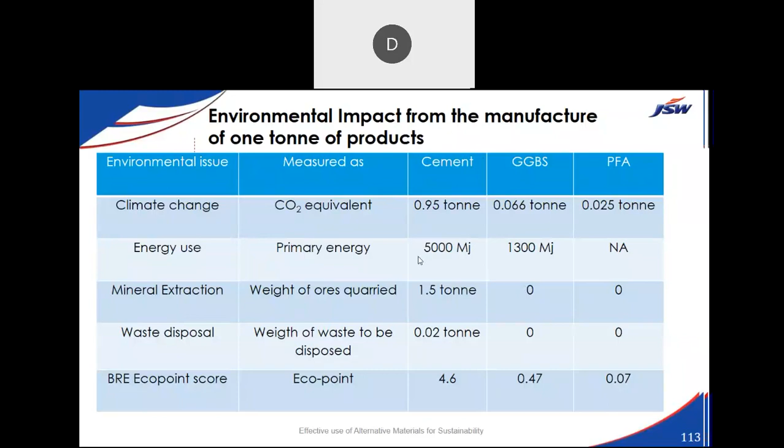So the comparison is there, here you can see the chart - cement, fly ash. Using this product, replacing it up to 70% is really economical and eco-friendly.

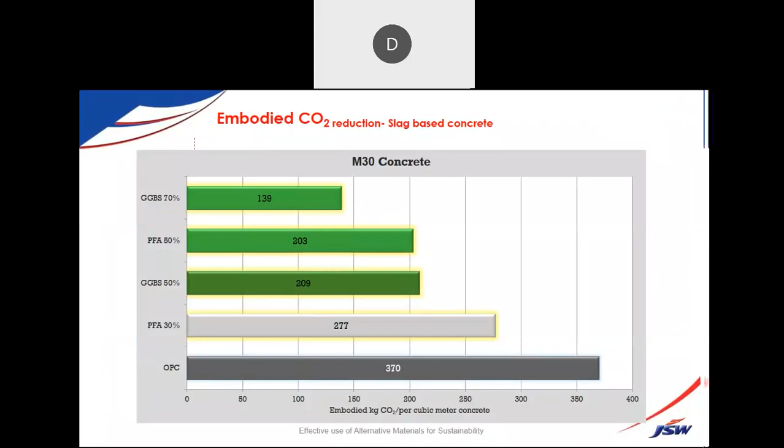As already discussed, each and every type of cement emits CO2 - PPC at 640 kg per ton, PSC at 490, GGBS only 65 kg. So you can use this product directly, blending with OPC, and reduce the carbon footprint.

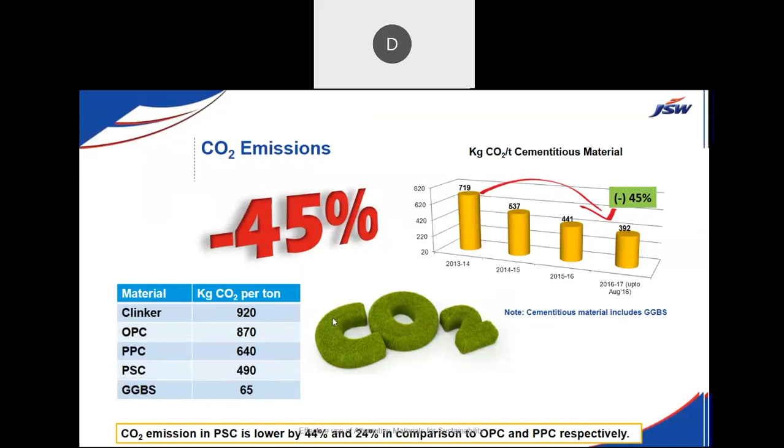I already told you, many companies are launching new products with technologies - Chryso launches EnviroMix, the first global range of admixtures, solutions and service for low carbon concrete. Using this new range of admixtures - as latest as May 18th, 2021 - you can make the concrete more sustainable and durable, with reduction of CO2 by 50%. That's what they are claiming.

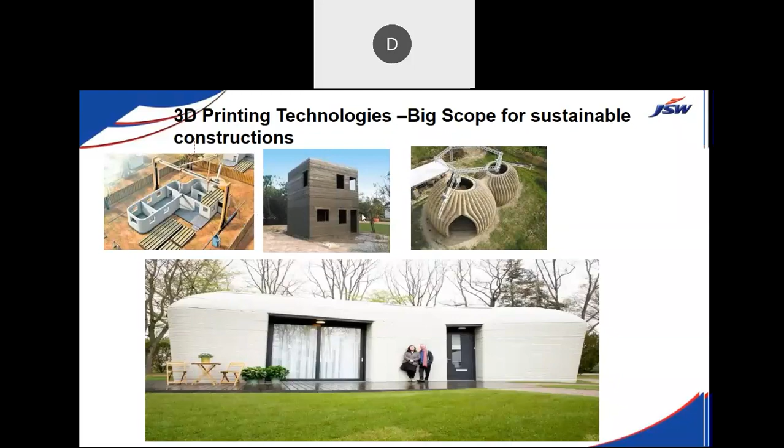One more technology is 3D printing technology, which is gaining acceptance everywhere. Many buildings are being constructed globally using 3D printing. This is one building done in Italy. This is our own L&T, which has a demonstration building in Chennai, done by 3D printing, where we can use thinner sections. Using eco-friendly materials, we can design the buildings.

Moving towards net zero buildings - overall, we should look at developing net zero buildings using alternative materials that are sustainable and at the same time make the construction durable.

So in conclusion, I would like to conclude my presentation today. Dear friends, whenever you design concrete, if you are doing site mix concrete, use blended cement, use PPC cement, slag cement, composite cement, masonry cement, like that.

When you are making or buying ready mix concrete, always buy ready mix concrete that has cementitious material like fly ash or GGBS. Also encourage usage of C&D waste products in construction. It will always help you. Using alternative materials, you can save the planet by reducing carbon emissions. Both durability and sustainability in concrete construction can be achieved by using alternative materials in construction.

That's what I wanted to say. I encourage all of you to adopt, when you are doing research work or projects, designing concrete using eco-friendly materials like GGBS, fly ash, slag sand, copper slag sand, recycled aggregates. So you just calculate, compared to the control mix, how much energy you are saving. You can make a project out of it.